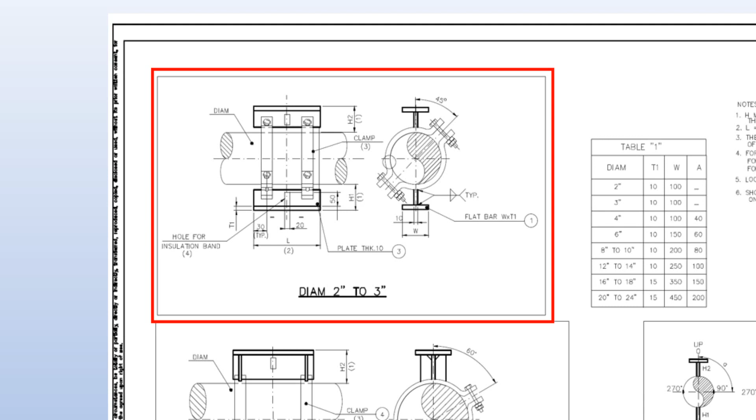Now let's start with part 1, which is the traditional way to get the dimensions of a certain group. Here in this group, which is CR03, as you can see, when you open this support group, it's related to spec. If you open this group, you will find two different sizes or two different shapes. The first shape suits sizes from 2 to 3 inches, and you can figure that this support does not include stiffening ribs.

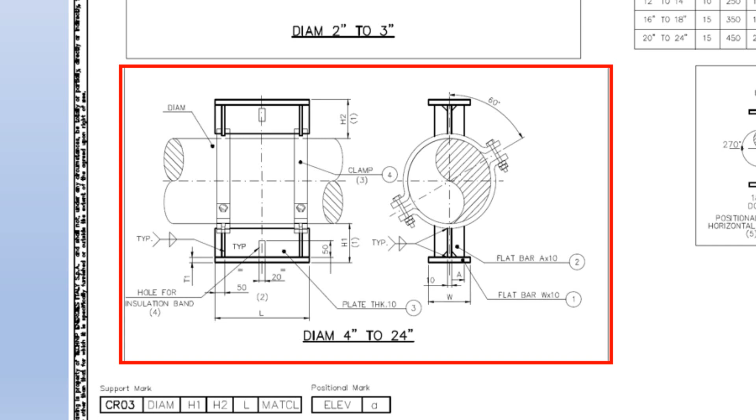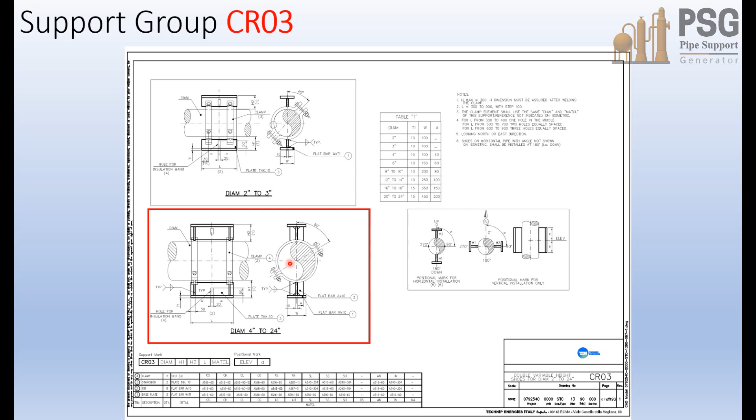And another shape for sizes from 4 inches up to 24 inches, and you can figure that in that shape you have stiffening ribs. You have 4 stiffening ribs at the bottom and another 4 at the top. And here, as you can see, you have 2 stiffening ribs on that side and another 2 on the other side. Totally, you have 8 stiffening ribs, 4 at the top side and 4 at the bottom side.

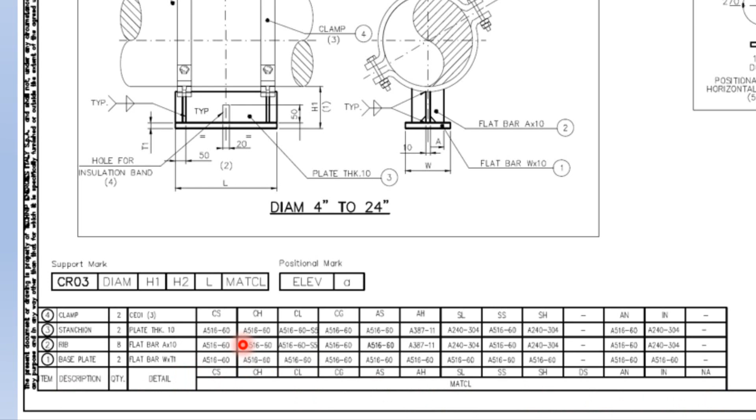And here you have a table to get the dimensions of T1, W and A based on the size of the main diameter. And here below you have a bill of material, and this bill of material includes the material class, and we will discuss the material class on the next slides.

Here, if we take a look at the support in depth, as you can see, we have the support mark name. It includes some terms. The first term includes the group name, which is CR03, and the second includes the diameter of the main line. This term indicates the size of the pipeline. And the next term from the support mark indicates the height of the bottom support, which is H1. It's measured from the outside diameter of the pipe to the end of the base plate.

The third term, which is H2, indicates the height of the top support measured from the outside surface of the pipe to the end of the base plate. And the previous last term, which is the L term, indicates the length of the base plate. Finally, the material class, and we will discuss this material class on the next slide. So if you get the main pipe diameter, you will get the other dimensions for T1, W, and A.

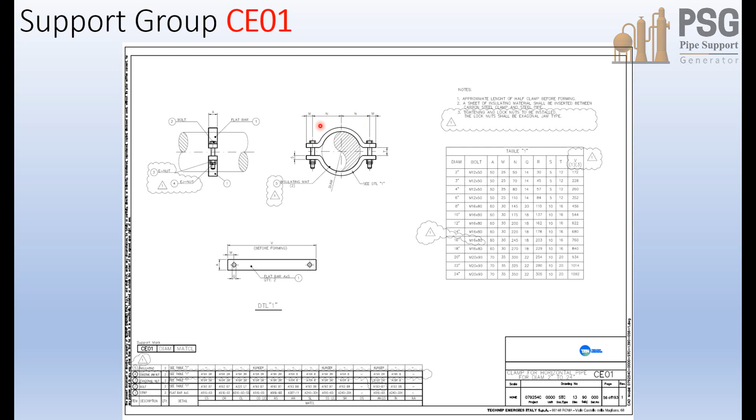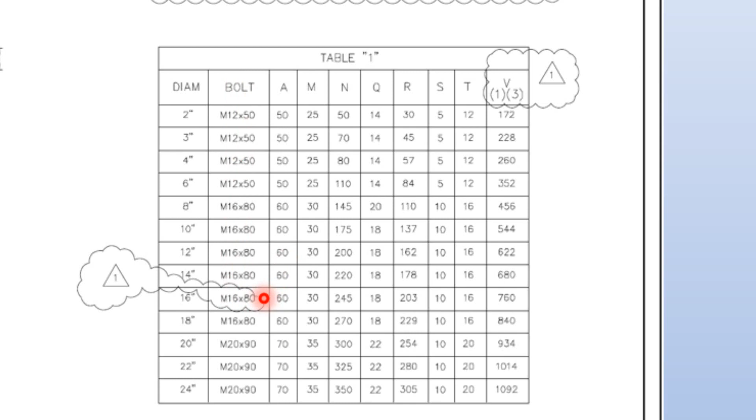Now as you can see, this clamp includes 2 plates, and you have tightening bolts, nuts, and jam nuts. And here the table indicates the size of the main pipe diameter, and on the row you will find the bolt length, bolt size, and the other dimensions for that plate, which are length, width, hole diameter, hole offset, and the plate thickness.

And here below you will find a bill of material for this support group. Now, for example, let's give a name for a support mark. Let's say...

CR03-20. As mentioned, 20 means the main pipe diameter, that is, the main diameter of that pipeline equals 20 inches. And here, dash 120, which means the height of the bottom support equals 120, measured from the outside surface of the pipe to the end of the base plate.

The second term equals 200, which defines the height of the top support measured from the outside diameter of the pipe up to the end of the base plate. And L, which equals 500, equals the length of this base plate, and finally the material class.

Now, to get the dimensions of that support mark, we will need to go to the tables which we mentioned on the previous slides. From here, you can figure that the main diameter is 20 inches size. And for the height of the bottom one is 120, the top height 200, the length is 500.

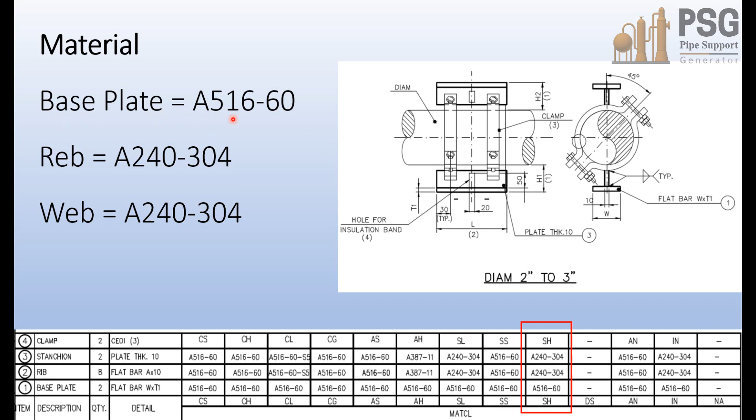Now, to get the material for the elements, we will need to go to the table for the first group, which is CR03, and for the class, which is material class SH. Now we can get the material for each element, and here the base plate material should be A516 with grade 60, and here the rib material and web material.

For the clamp, the same thing, we will select SH material class and get the materials for each element.

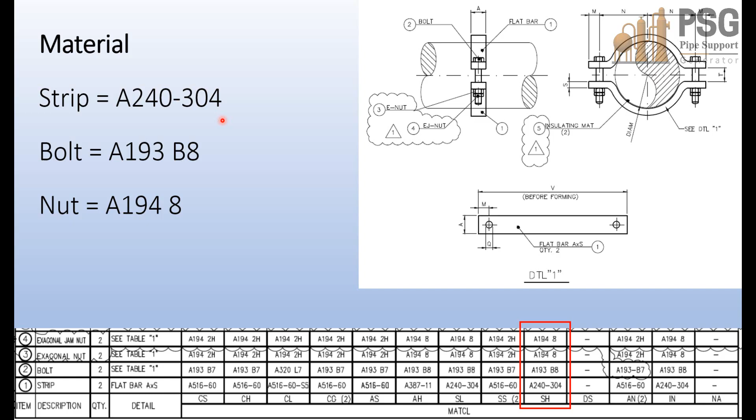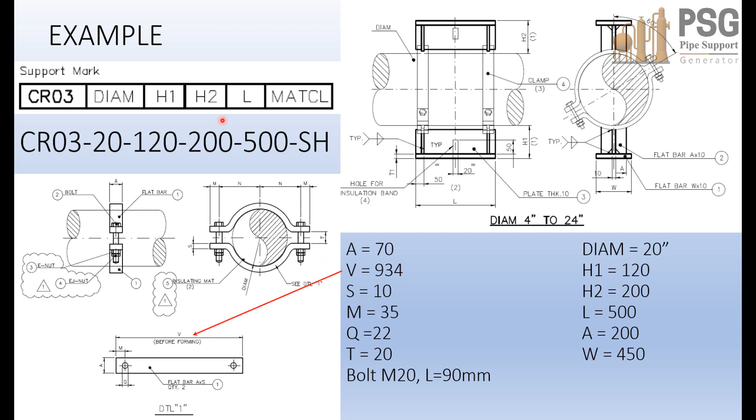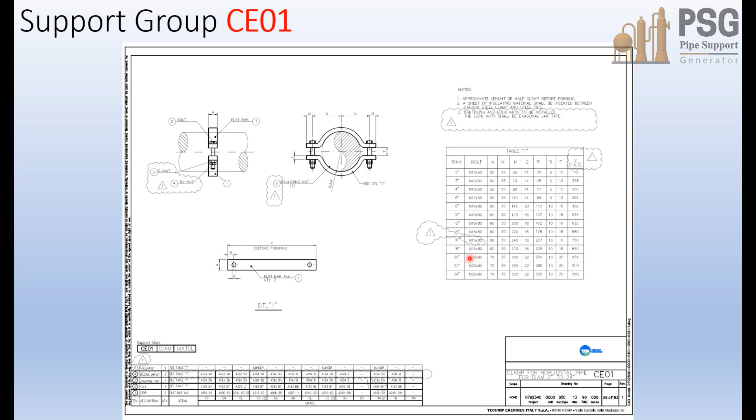From here you can figure easily how difficult it is to get all of those dimensions from the spec, and to draw a single support mark means a lot of pain and consumes a lot of time, opening the spec and getting the dimensions from it, going to tables like that one, for example for size 20, and getting all dimensions for this clamp, and the same for that support, going with that size and getting the dimensions of T1, W, and A, and you will do that for each support mark.

Okay, now let's take this support mark and try to draw it by using PSG software.

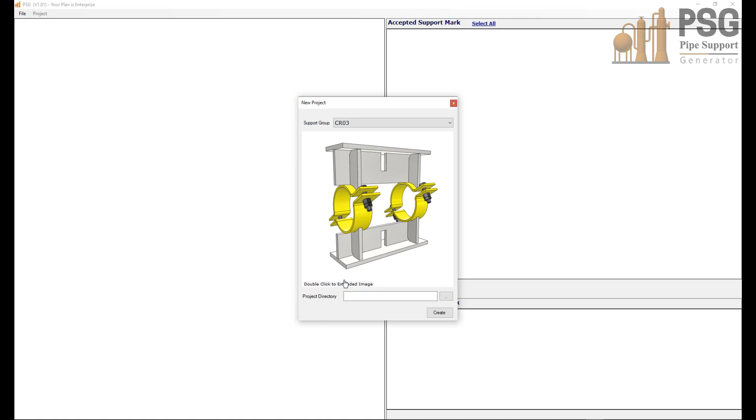Now let's open PSG, and from here let's create a new project. In this list you will find a list of items. Let's select CR03, which indicates this support, and if you would like to open the spec, just double click on this text and you will open the spec here.

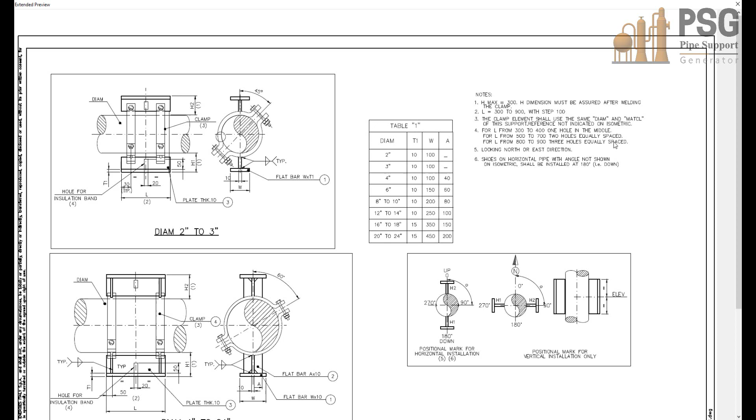So if you would like to review something, you can do that easily. Here in that area, note number 4, you can figure that you have a slot hole on this web. This slot could be a single slot in case the length equals 300 to 400. If it's from 500 to 700, you will have 2 slots. In case the length equals 800 to 900, you will have 3 slot holes. And all of that you should take care of during the modeling or preparing the final drawing.

Now let's create this group. Select the location of the group, and from create let's select this group, and from here let's add the support mark, and let's make the quantity as 1 and painting system A1, for example.

And now let's make a validation to check if this support mark name is identical or suits the spec or not. For example, if you have a size, let's say it's 30 inches, okay, if you click validate, automatically PSG will reject it because this size is not included on the spec.

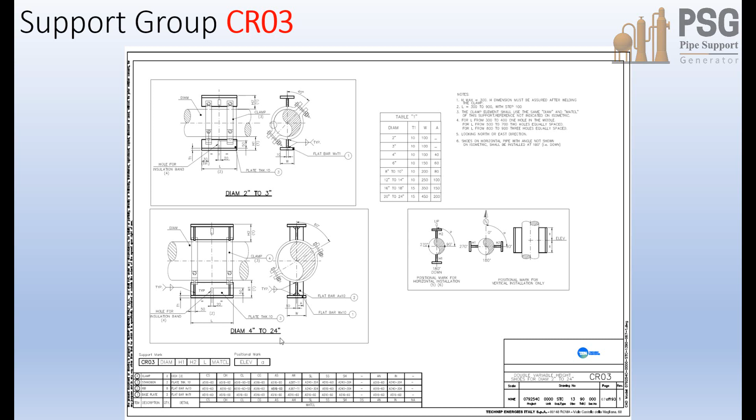So if we come back to the spec again here, as mentioned here, you can figure that the sizes range from 2 to 3, and for the second type from 4 to 24. So any size larger or smaller than that is not indicated on the spec, so PSG will reject it or refuse it.

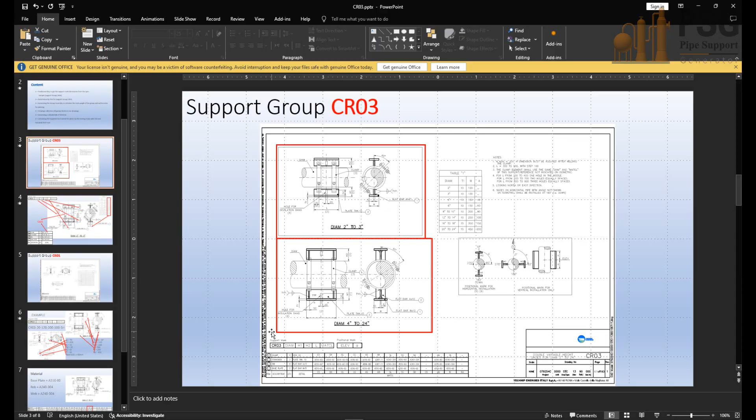So now let's change it again to 20 inches and click validate. Now it's accepted. Now let's create the 3D model of this support mark and check how much time it takes to draw the 3D model and the fabrication drawings for the support.

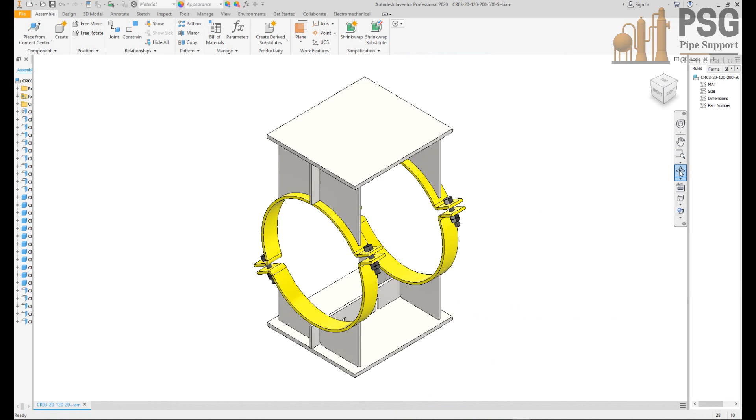As you can see, in seconds we generate the 3D model and fabrication drawings for this support mark. Now let's open the assembly. Here, let's come back to Autodesk Inventor. As you can see, because the width of this base plate, or the length, equals 500 as per the spec, you will need 2 slots here. Automatically, PSG created them with equal spacing. Okay, so we have this support suited to the 20 inch pipe size.

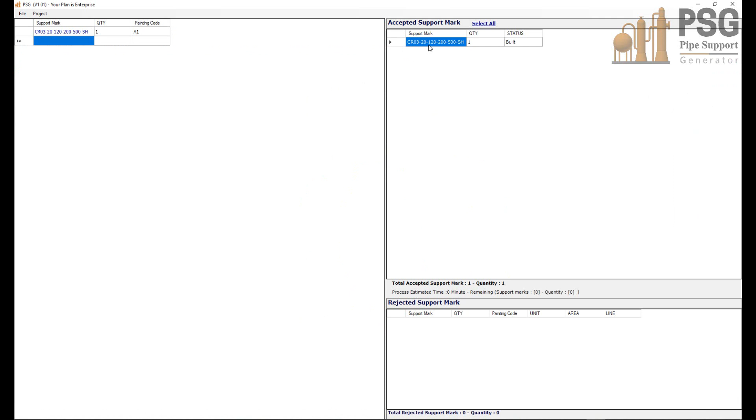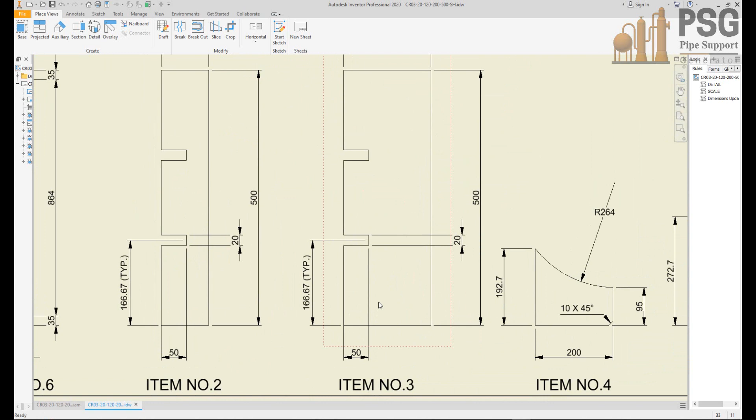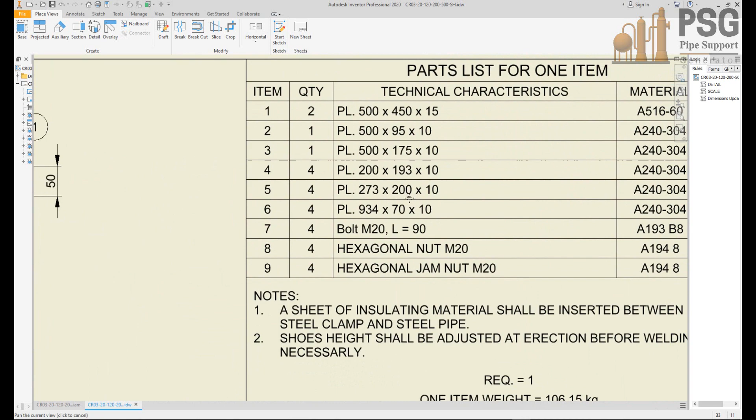Let's open the drawing. As you can see here, you have the height at the bottom, 120, and the top height of the top base is 200, and here the diameter of the pipe, and here you have the bottom and the top stiffening ribs, and here the clamp dimensions, which are 70 and 934 as mentioned in the spec, and here the stiffening ribs, and a detailed bill of material for this support mark for items 1, 2, 3 up to 9.

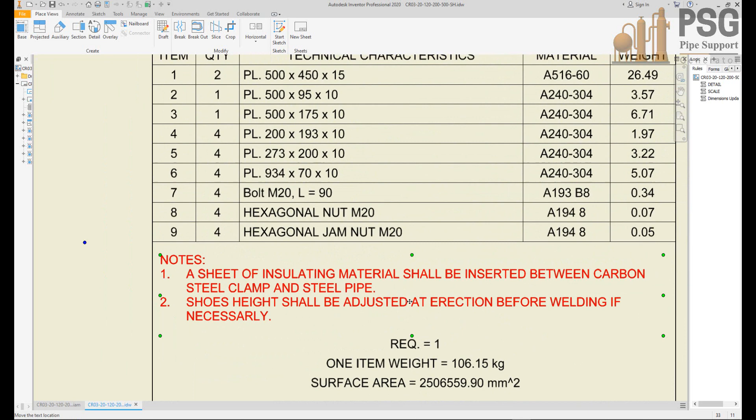So with a detailed material, the material automatically changes based on your selection for the support mark and the material class, and here the quantity of supports required, and the weight of the support mark, and the total surface area for the support mark. So you can imagine how much time you will save in case of using PSG to generate the support mark.

Now, it's not an issue if you have one support or 2 supports, but if you have a huge number of supports, how can you deal with that? Actually, if you work in the traditional way, you will face a problem. To get a dimension for each support mark to generate it is a pain.

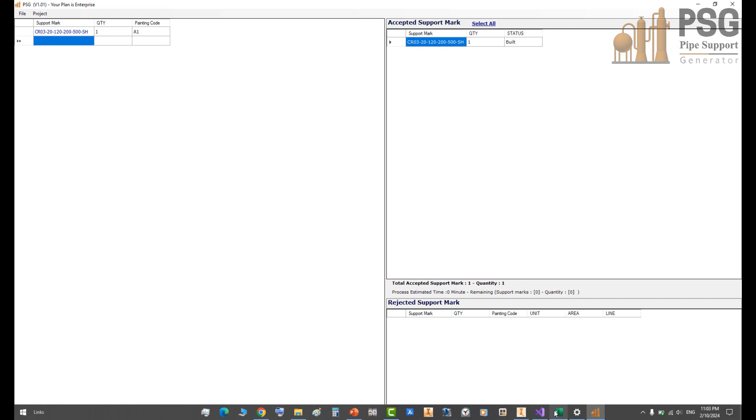Now let's reset this project and collect some supports generated by PSG. So let's clear this list and take that list, which includes a painting system and line and area. And from here, let's click on paste. Now we have this list for the support marks. Now let's make a validation to check that list.

Actually, PSG detects that we have some typical items. So we have 21 typical support marks with a total of 107 supports as the quantity. Now let's start generating — let's save this project first, and from here let's start generating the support marks by using PSG software.

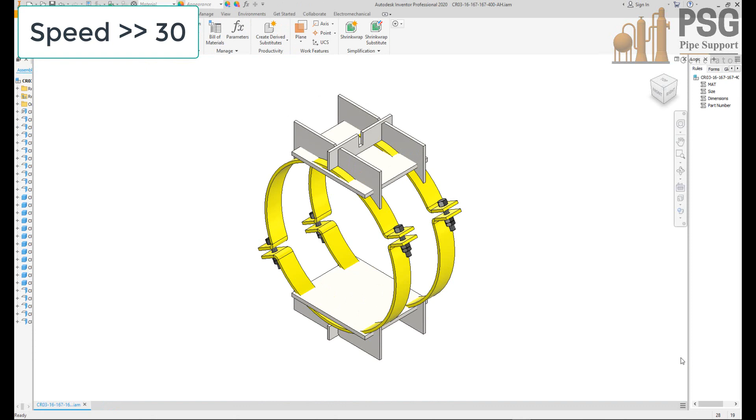Now we complete the generation for all the support marks with all drawings, and from here we will go to the next step on the next part of this session.

Now we will discuss the third part of this session, which is creating the total assembly for all of this group to calculate the total weight for the fabricated materials, and calculate the painting system surface area.

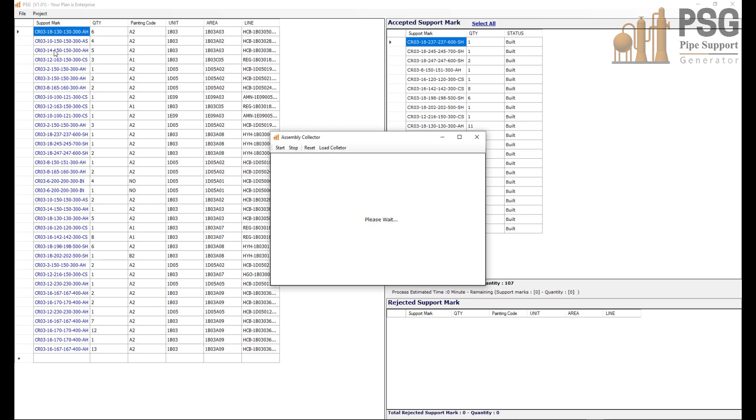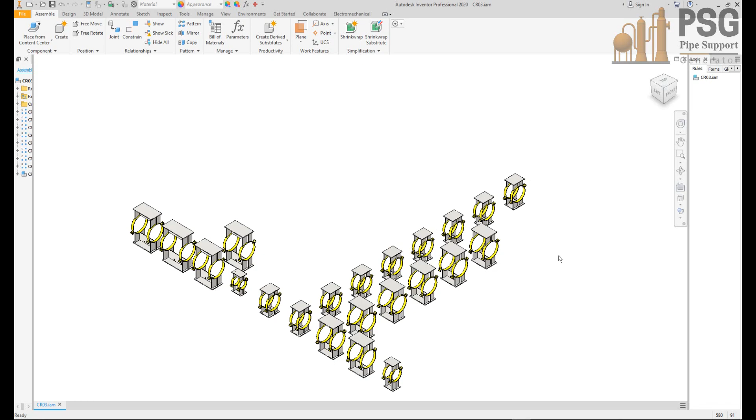So from here, from project, let's select a project, the assembly collector, and from the start button, we will click on start, and from here PSG will start generating the total assembly for this project, which indicates the required number from each support mark. Okay, and that will give you the real indication for the weights and surface area for all of the group.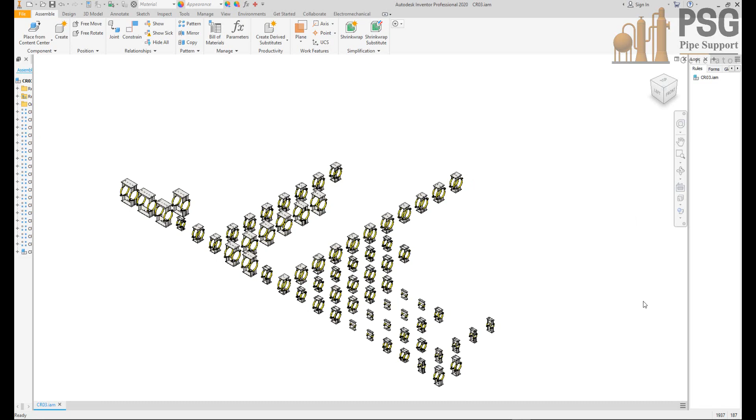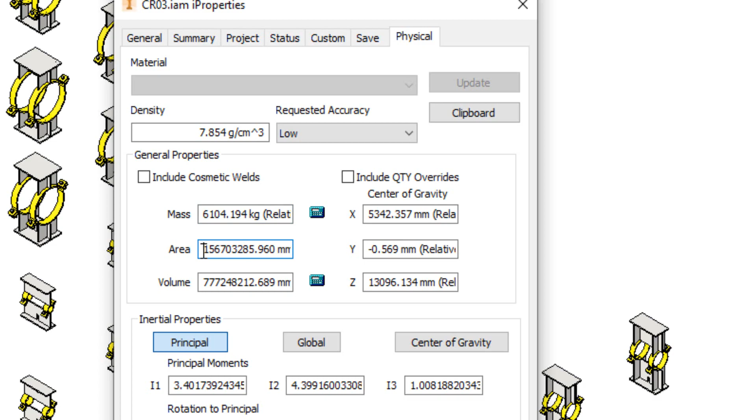Here, finally, the total assembly for the support mark is finished. Now let's calculate the total weight from the physical properties. Here, as you can see, it equals 6.1 tons. Okay, and here the surface area in millimeters to the power 2. That's the surface area for this one.

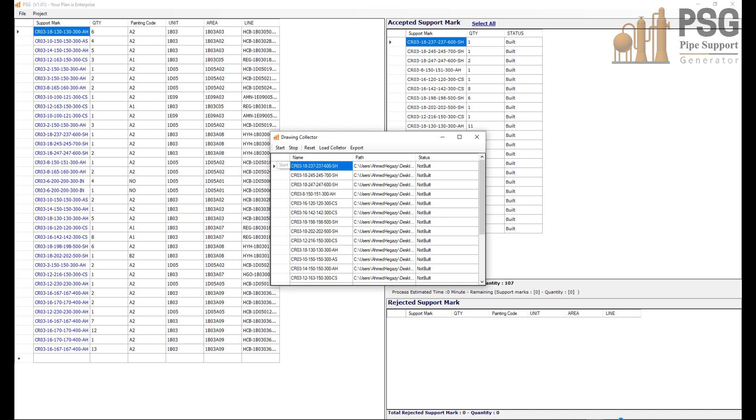Now let's go to the third part, which is collecting the drawings in one drawing. Let's close this, and from project let's select drawing collector, and from start let's collect all drawings in all sheets in one drawing. As you can see here, the number of sheets increased.

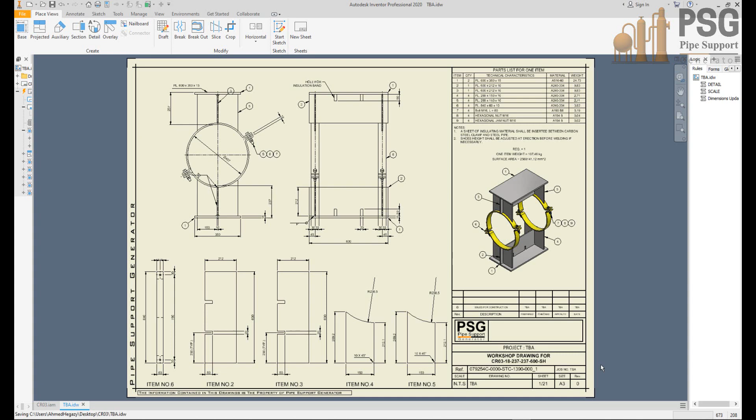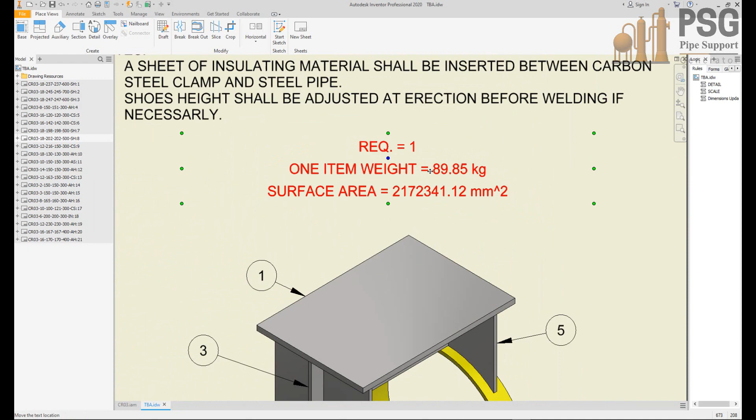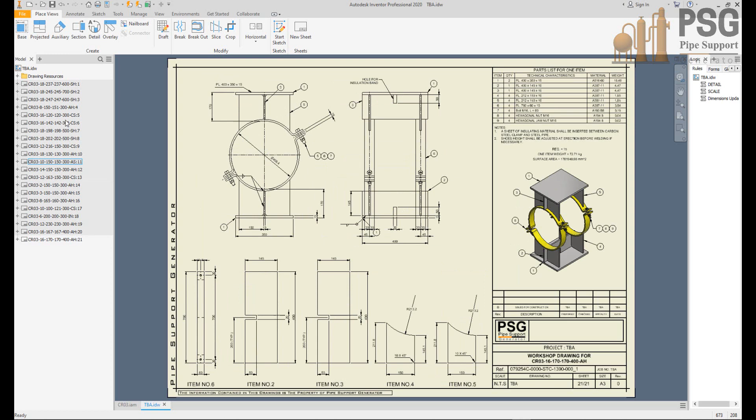Now we create all drawings. Here you have all sheets for each support mark, and each sheet takes the name of the support mark. So easily you can go to your drawing and check the bill of material for this support mark, check the quantity, weight and surface area, pick the number of the sheet, the dimensions of each element, the height for top and bottom, which should be identical with the support mark values. That way you can collect all drawings in one sheet, then print in DWG, PDF, or DXF, so you have different ways to export your drawing.

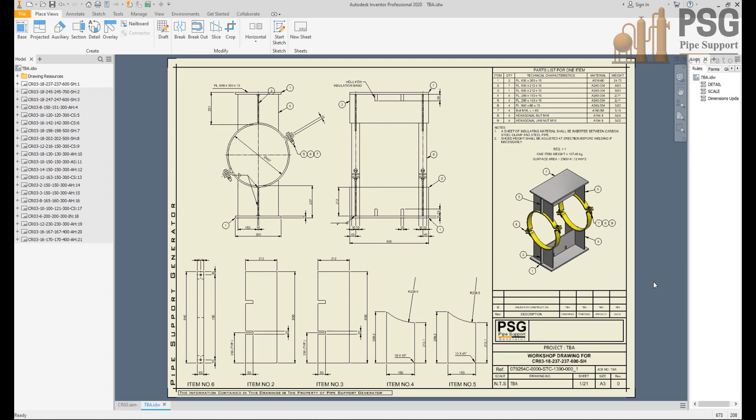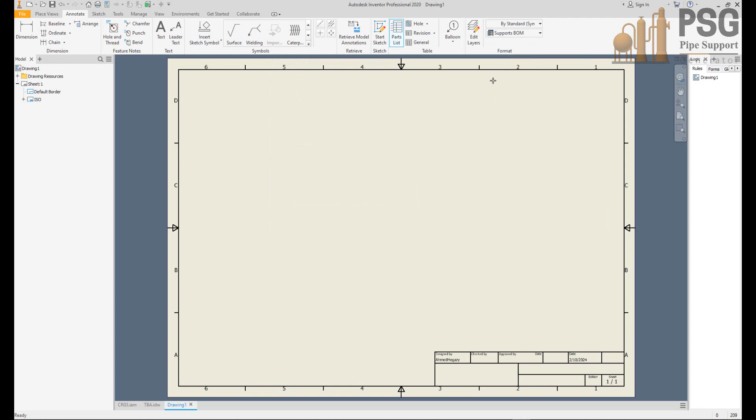Now let's go to part 5, which is calculating the detailed bill of material for this support group. Let's open a new drawing, and from here let's add a bill of material. Let's select the total assembly of the group, select parts only, and from here select support bill of material and add this. Let's delete the border and title block.

Now let's move this list right here, and open this part list. You will find a detailed bill of material for each element, and you will figure that you have 185 elements in this bill of material.

Some of them are identical, like bolts, nuts, and some plate dimensions, so we can merge the identical items. We will make the merging based on the status, then the material, then the mass, and click OK.

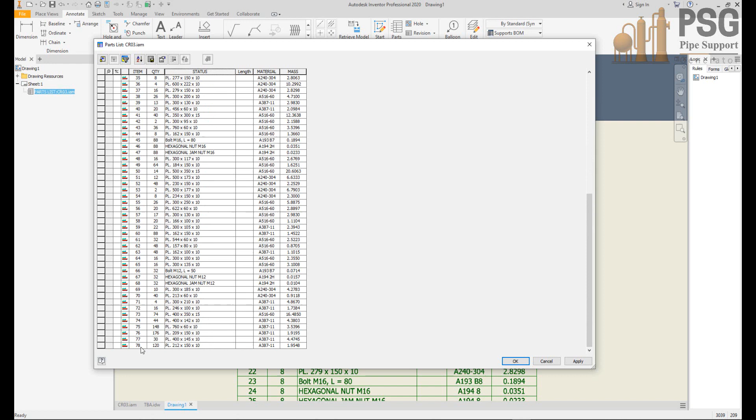Now as you can see, the number reduced from 185 to 78 items only. Now you can make a sorting by the name, so let's sort by status, and as you can see, we have the bolts and nuts at the top, then all plates at the bottom. Now let's arrange the numbering, and here finally we have this bill of material.

If we take a copy from this list and go to our Excel sheet and put these values here, we get the total weight for the elements, and now let's make the total weight for plate elements. Let's move down here and make a summation for the bolts and nuts. As you can see, the weight of the bolts and nuts in this group equals around 100 kilograms.

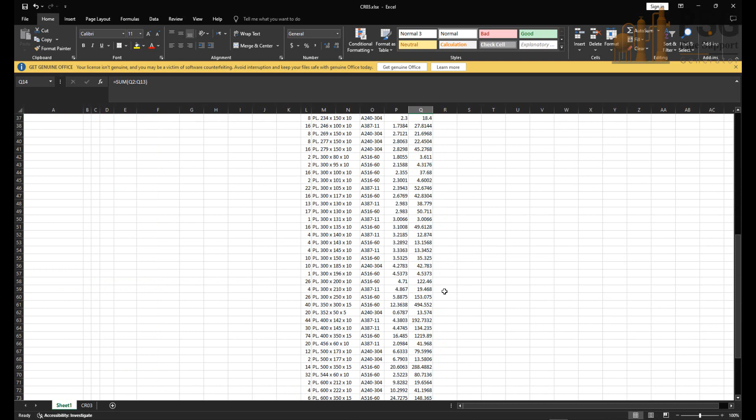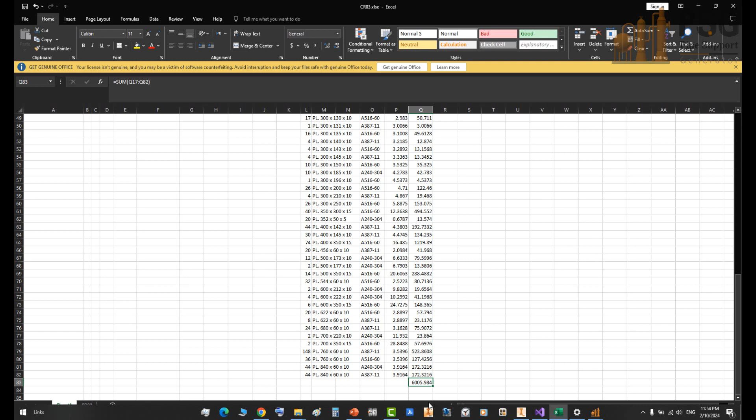And for the plates, let's make a summation here. So the total weight of the plates equals around 6 tons. Now let's move to the next step, which is generating the nesting study for this project.

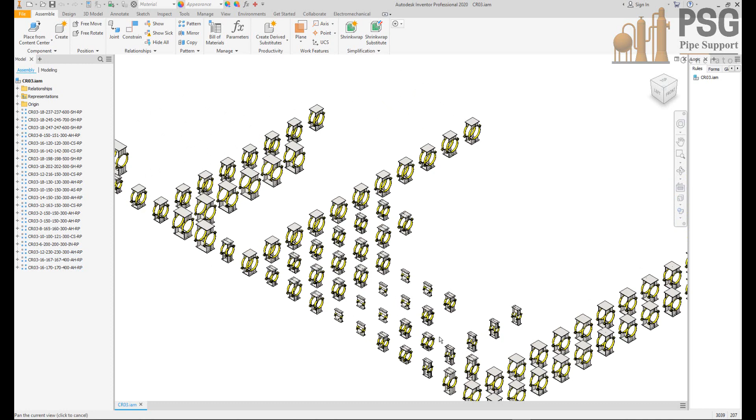Now let's go to the last part of this session, part number 6, which is calculating the raw material required for plates by using the Autodesk Nest tool, and how we will do that. Now we create the final assembly for the support group. From the assembly tab, let's select create nest, and after getting this form, let's select standard bill of material.

In this step, the Autodesk Nest tool will collect the plates and all elements in this project and get the material and thickness for each plate, then make a list of elements to start the nesting process.

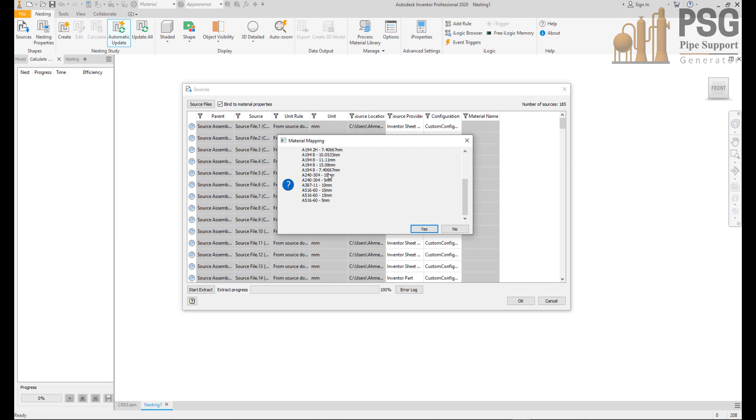As you can see, you have a list of elements, some for bolts and some for plates. After importing them, we will remove the bolts material and keep the plates material. As you can see, we have A240 grade 304 with 10 millimeter thickness and the other plates here. Let's click OK.

Now the nesting tool will get the flat pattern for each element to prepare it for the nesting study. We will wait some minutes until finishing this process.

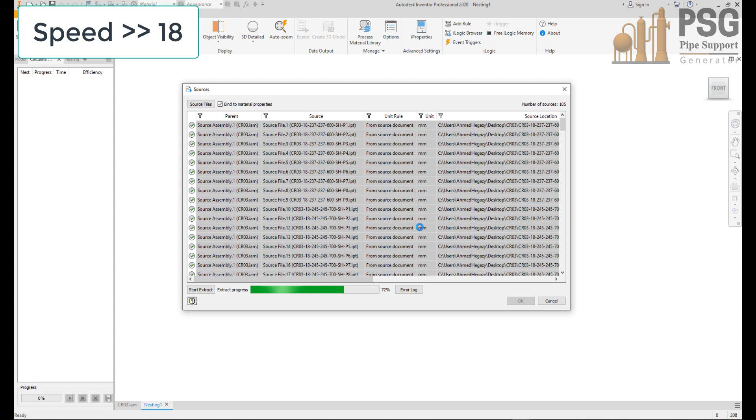Now this step is done, and now it's time to start. As you can see, all items are imported to the nesting tool. Now from the process material library, we will remove all the other materials for bolts and nuts, so like that we will remove it, and keep all plate materials.

Okay, now let's rename the materials. Now we keep all materials, material name and thickness appear here. So let's take a copy from that and change the ID of the material right here, like that, and for this material, and finally this alloy material with 10 millimeters in thickness, and here we have a list of elements.

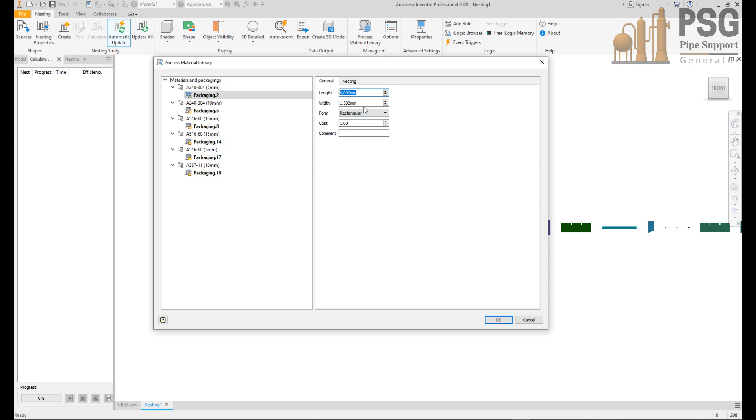Now let's accept this and start the nesting process. By the way, before going to the next step, here you have the package for each material, so you can define the length and width for the raw material that you have in your stock or workshop.

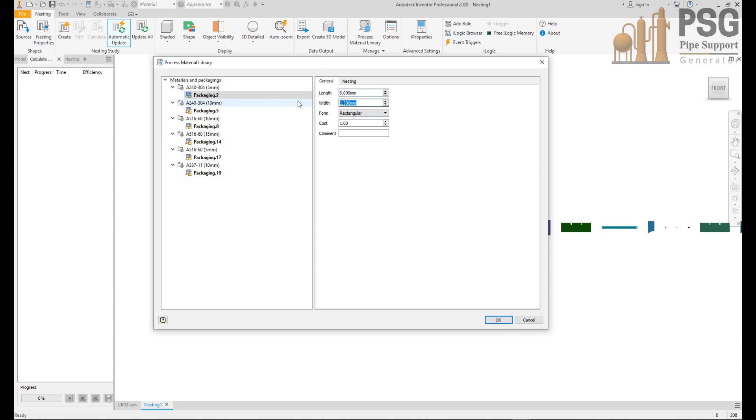So you can define that, and you can make some modifications regarding the item separation, frame width from the edges and the orientation of the plates. So we will keep the values as default for the length, 6 meters length and 1.5 meter width for each plate. Now let's start the creation of the nesting study.

And from here, let's select the minimum length to arrange the plates on the short side as much as possible and keep the remaining length on the long side. So from here, select this option and click on OK. As you can see on the left hand side, the nesting process started for each plate category. So we will wait minutes to get the final nesting study for each plate.

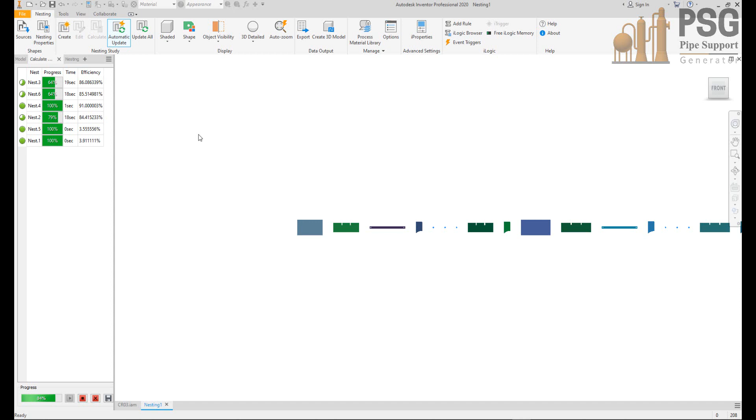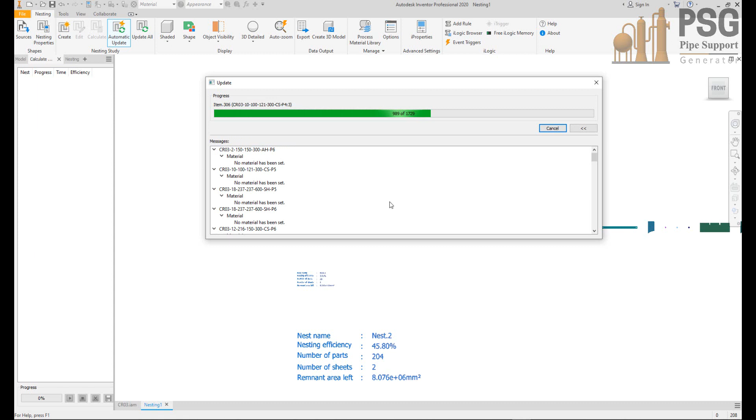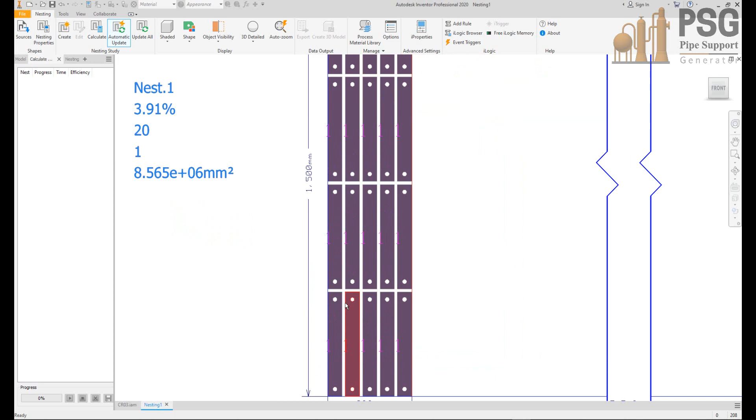Now the nesting study is done. Let's click on save. And here we have each nesting study for each material category, material and thickness. Here for the stainless steel material, as you can see, we will need this piece, and here we have the arrangement of plates in this sheet.

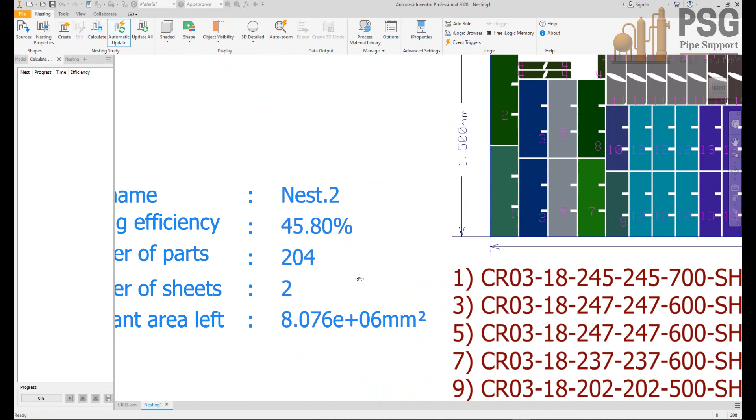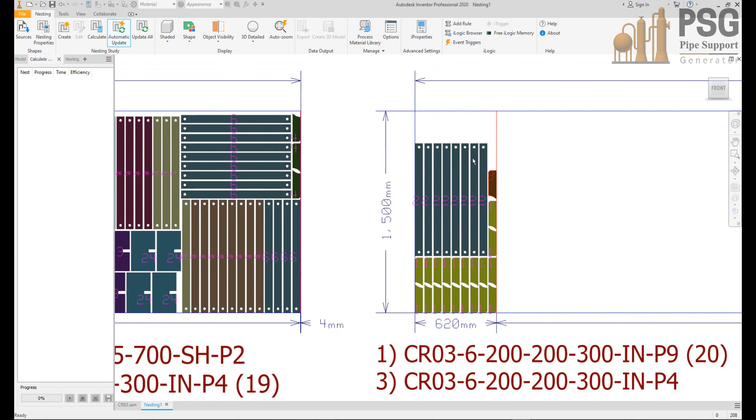For the stainless steel material with 10 millimeters thickness, we will need 2 sheets, so the total number of sheets required is 2. And here's the first sheet plates arrangement, and here you have the plate name and the required quantity between brackets for each plate, and the name of the plate appears here. And the second sheet will include those parts, and we will need around 620 millimeters only for the second part.

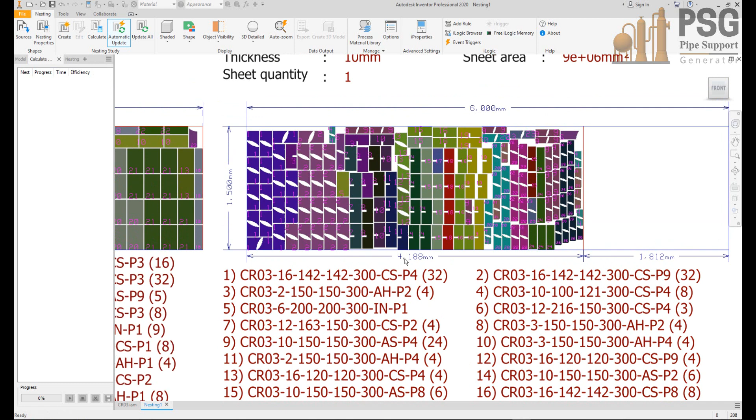For the carbon steel material with 10 millimeters thickness, as you can see, we will need 2 sheets in total, and the arrangement for the first sheet will be like that, and the parts appear here, and the quantity for each part between brackets appears here. And that's the second sheet. We will need around 4 meters and 200 millimeters of length.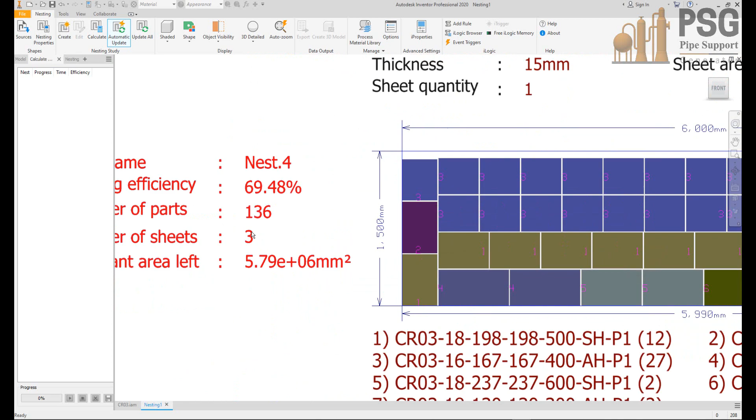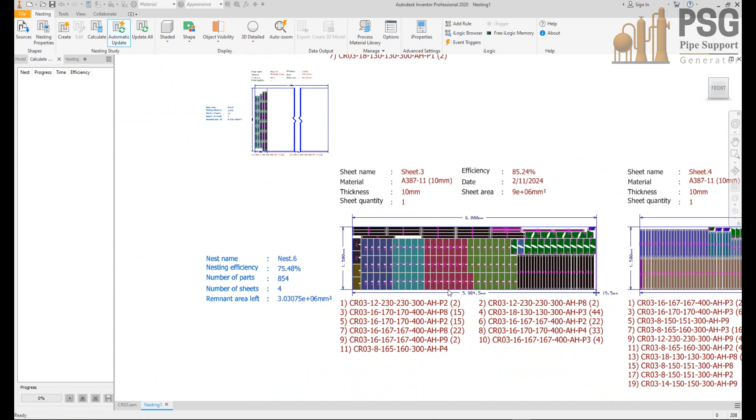And for the carbon steel material with 15 millimeters thickness, in total we will need 3 sheets, and the arrangement of plates will be like that. And for the carbon steel with 5 millimeters thickness, here we have that plate arrangement. And finally, for the alloy material, we will need 4 sheets, and the plates in each sheet can be arranged that way.

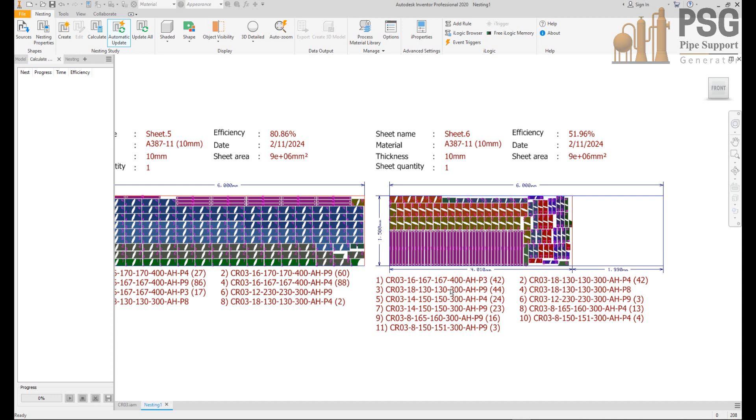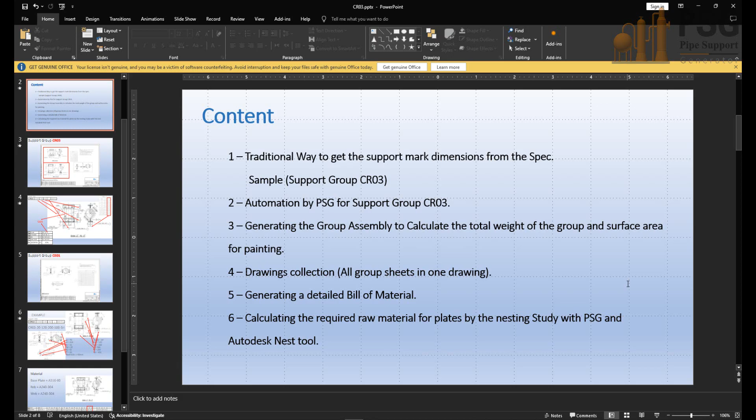And you can export each of those sheets in DXF extension to send it to your workshop to start CNC machining or the cutting process using the cutting machines based on the DXF file. Now I think we covered all points in our session. So let's review that again.

We discussed the traditional way to get the support mark dimensions from the spec and took a sample for CR03. And after getting these dimensions manually, you will need to use AutoCAD or Autodesk Inventor or any other CAD software to generate your drawings based on the extracted dimensions from the spec. And we discussed how to get those dimensions from the specs and how to understand the arrangement.

On the second point, we discussed how to deal with PSG to generate a support mark for the support group CR03, and we generated a huge number of supports the same way. In part 3, we discussed how to generate the assembly for all of the group, including the required number for each support mark, calculate the total weight of the group as a fabricated weight, and calculate the painting area or the surface area for all of the group.

In step 4, we discussed how to collect all drawings in one drawing with different sheets. And in step 5, we discussed how to generate a detailed bill of material for the group and calculate the separate weight for nuts and bolts, and the separate weight for plates. And if you have pipes or hot rolled sections, you can get the separate weight for them.

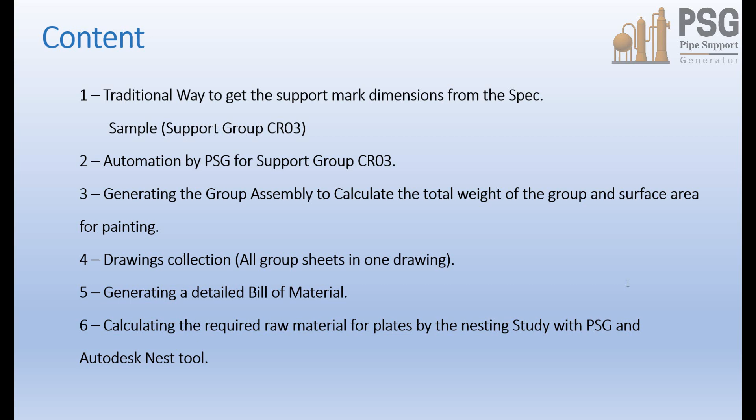And finally, we discussed how to make a nesting for plates and get the required raw material that you will need in your workshop, and how you can cut it to save raw material. So we discussed the 6 points, and I hope this session gives you a good indication of the capabilities of PSG software and how it works.